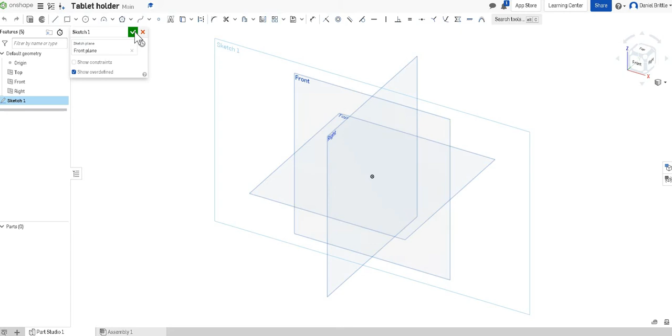We're going to start by creating the adjustable bit that actually holds the tablet. So we'll start on the front work plane, start a new sketch, and draw a rectangle to start with. We'll look at it from the front to make it a little bit easier.

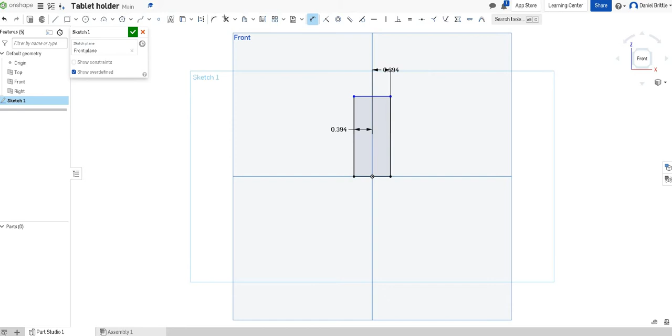I want this to be even, symmetrical either side of that centre line, which will make everything easier as we move on, especially because we want different parts to interact with one another. The width of this is going to be 2 centimetres, so 1 centimetre this side of the line and 1 centimetre the other side. We'll change our workspace units to millimetres, which will make it a bit more user friendly as we move through all of this.

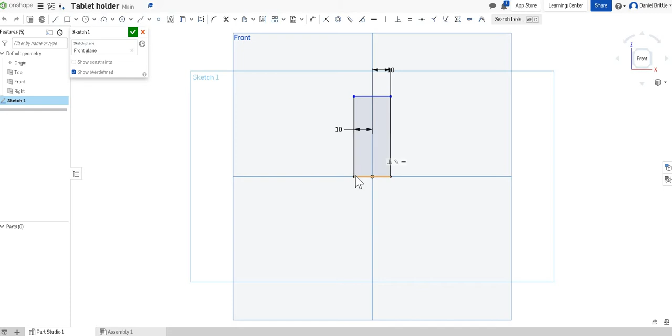Go back into our sketch, since it automatically exited. Right click and edit, and you can see it's 10 millimetres either side, which is perfect. We started it from the bottom line, so using the dimension tool we're going to measure the distance up, making that 220 millimetres to start with. That's quite a long section.

We're then going to create the bottom part across here, and you imagine our tablet would sit on there, with this bottom part holding the bottom. This will attach to another part which will hold the top and clamp them together.

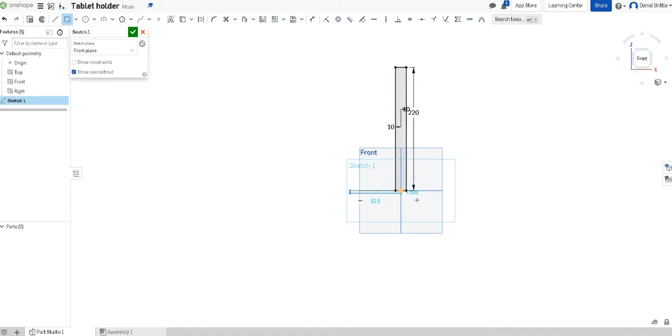So we're then going to draw a rectangle in here. That's not actually connected to that dot for some reason, very odd, so go up to make sure it does connect. This time I'm going to zoom in to make it a bit easier, connecting and going that way as well.

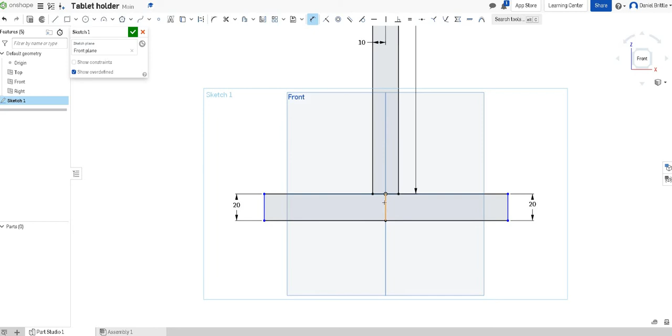Let's dimension everything. This is going to be 20 millimetres, so it's the same width as the part going up the top, 20 millimetres this side too. The reason I've done that in 2 blocks here, we'll see in a little while.

This part here is going to be 70, because it's 140 wide in total, and we're going to go 70 from this side as well, giving us that 140 total distance.

We're then going to use the sketch fillet. So we can either 3D extrude our sketch and then round it, or fillet the 3D, or you can do it in a sketch. We're going to do it in a sketch.

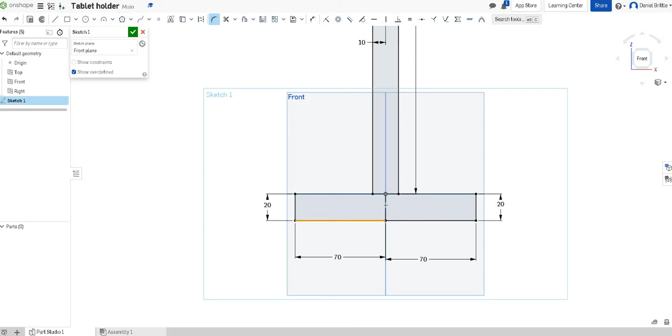That is going to fillet here, and we're actually going to change that to 20 mil. We're then going to do the same on here and change that to 20 mil as well, so that's even. This part on here now, we don't want that to be 20, we're going to make that 10.

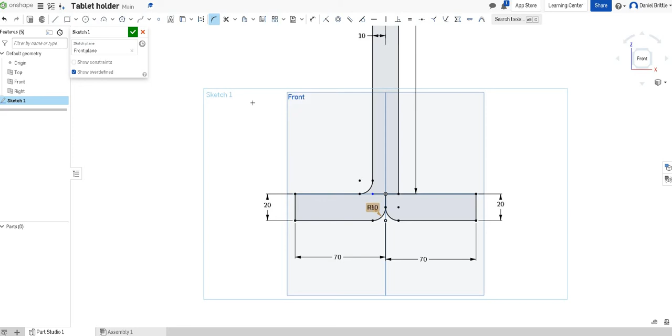It's actually moving that at the same time, so if I go Control and Z on my keyboard, it takes that backwards. We'll leave that at 20, and we're going to go in with the final one from here to here.

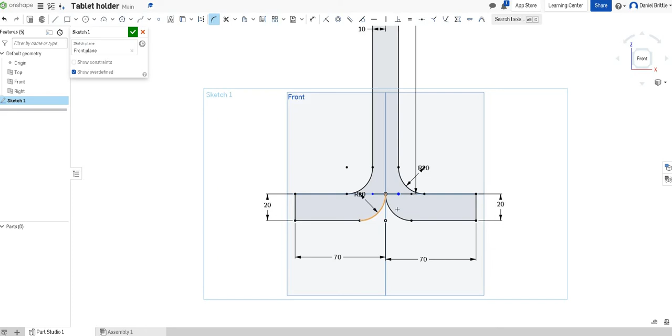I've lost my sketch tool now, so it goes back into sketch fillet, and we're going to do that one as well. That's just made that one 10, we'll up that to 20 so they're all the same. We've roughly got the look that we're going for, so we'll click the tick, and we're happy with that now.

This is all 5 millimetres thick. So what we will do, just looking at it in 3D, extrude, and make that a 5 millimetre extrude, tick. We're then going to add the little mounts here and there to actually hold the tablet.

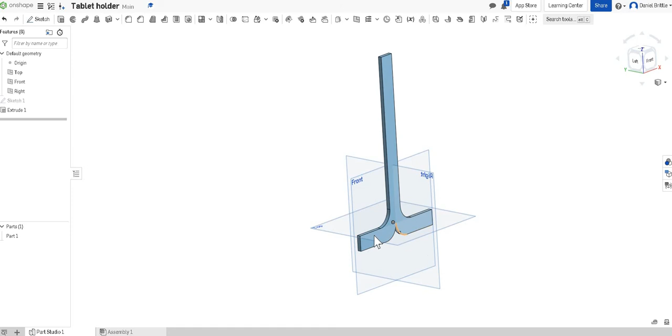We're going to click on this surface, go to sketch, look at it from the front, and we're going to extrude now 2 rectangles in these bottom corners here. So one there and one here, and we're going to dimension those with a little bit of accuracy as well.

Using the dimension tool, we want the height, that's going to be the thickness that we extruded the other part, so that's 5 millimetres, same on this side, 5 millimetres, and the width of those is going to be 20 and 20. We can then tick that.

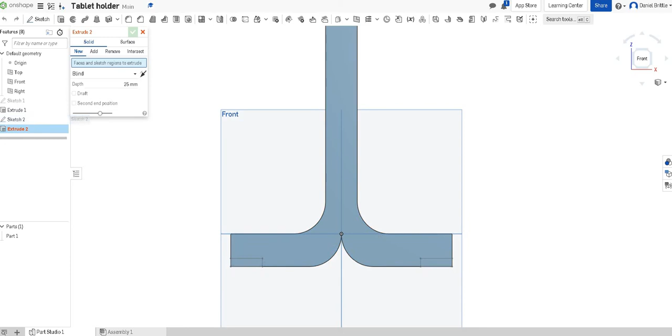We're going to extrude, select sketch 2 so it does both at the same time, and we're just going out for 25 millimetres on this, so 25 millimetres on there. So far so good. We just need a bit going up off this to stop the tablet falling forward.

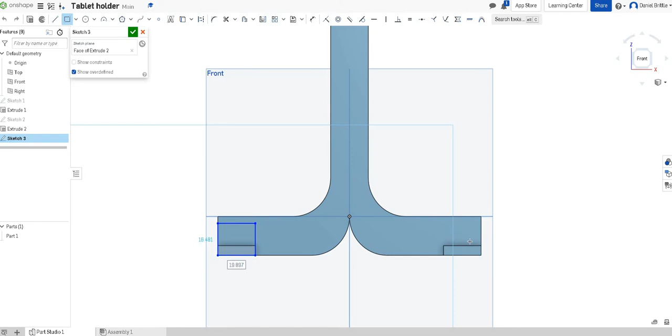So again, let's click on the surface we want to sketch on, click sketch, look at it from the front. We're going to draw another rectangle on there, and I'll show you a trick as you're hovering over the corner, making sure we've got the circle with a square around it to say it's snapping to that corner. Then dimension it, going roughly halfway, maybe 15 mil on this side as well, and the width to be 20, matching the other rectangles we drew out. Click tick, look at it in 3D.

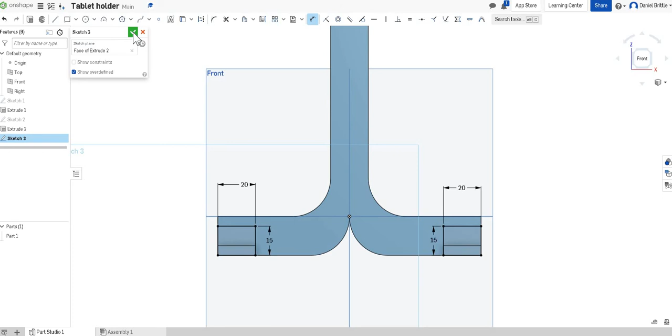We want to extrude the whole of sketch 3, selecting it from the menu here. If we click down here, it would only select a part at a time, so we're making that 5 mil to match all the rest. We click finish on there, and that is all looking good so far.

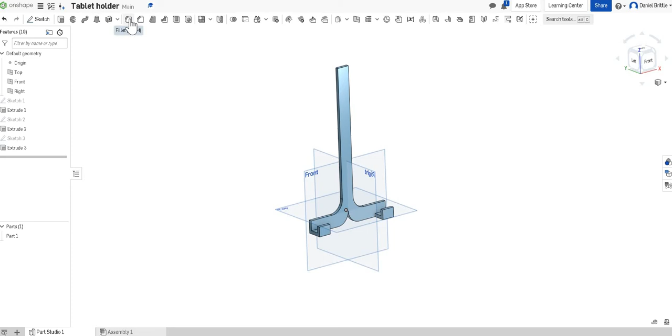What we're going to do now is add some rounds to all of the edges to make it look more realistic, as if you're actually seeing it in real life. So we're going to use the fillet tool here. We're going to select this surface, so all of the lines on this surface are filleted 1 millimeter.

And then if we turn it round, we're also going to do that on the back side here. It's throwing up some errors there, so let's see when we click tick what happens. And you see it's failing, so what we want to do is try and figure out why that's happened.

So we're going to right click and edit. See the red line down here? That's indicating it's going to fail. So if we deselect those faces, we're then going to select the lines going around, and we can keep clicking around all of these to see what's happening.

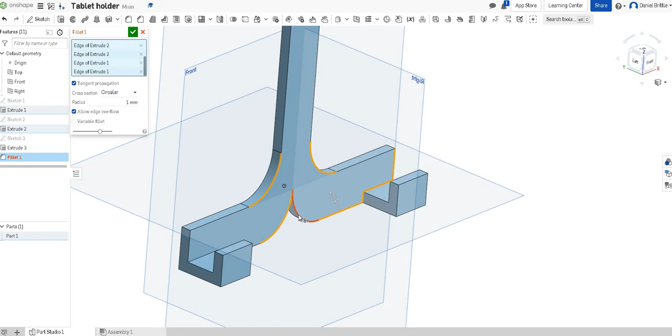So we're going round all of those now to there. You see it's not liking these ones in here. So we can get rid of those, get rid of these until we've got no red lines at all.

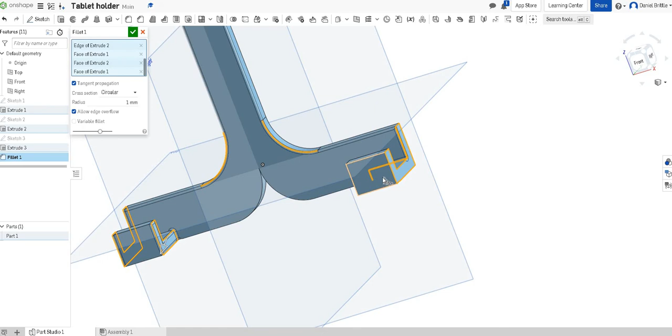And we can just do it a part at a time. So if we do these end faces, it's doing all of those. End faces on here, and it's actually doing these more successfully than we were a moment ago. So zoom in.

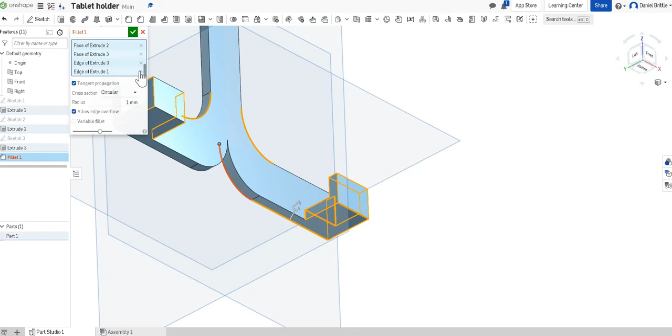It's not liking that one there, so we'll deselect that face again, and just select this line. Not liking that one either, so we can take it off. Whenever you see a red line, we can just take that off, and we can go and adjust that a little bit later on. Going on here and on this line, so they're working quite nicely.

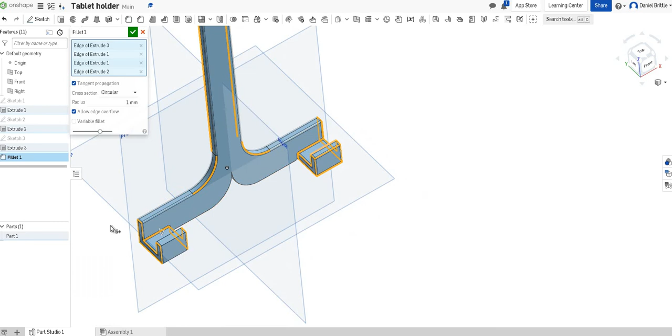We've got the ends, and most of these now are done. One I would like to do is this inside to match that side as well, and this inner corner. By giving that a fillet, it actually makes it a stronger part as well. So when you are manufacturing, you tend to create these fillets to improve the strength of different parts in many cases.

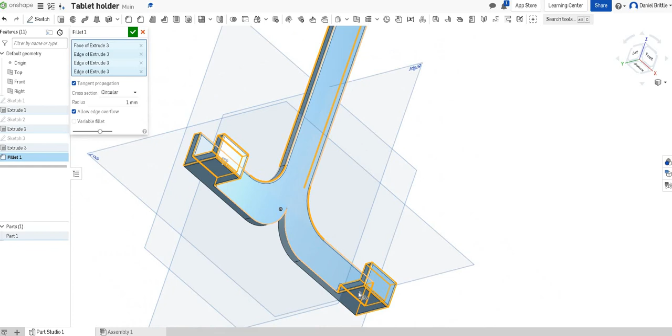So it looks now like we've got most of our filleting done. I'm going to just click the tick on that, and we can have a look around so we can see that there's not too many missed.

The most obvious ones are on the bottom there that were playing up and giving us the red lines, and we can go and try and work them out in a moment, but if we can't work them out, they can stay as they are, and we'll just avoid the issue for a little bit longer.

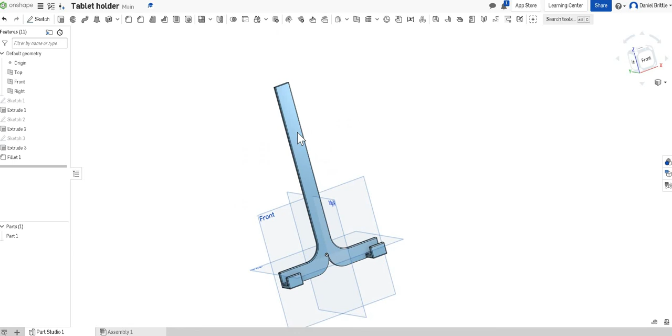Okay, so that looks, for me, fairly realistic. The only disappointment is these corners. I think they look a little bit sharp and tacky, so I'd like to go back in and round them more. And the reason we're doing this and changing our mind is because you don't always know what you want to model straight away, so I would like you to really learn to go back and change features.

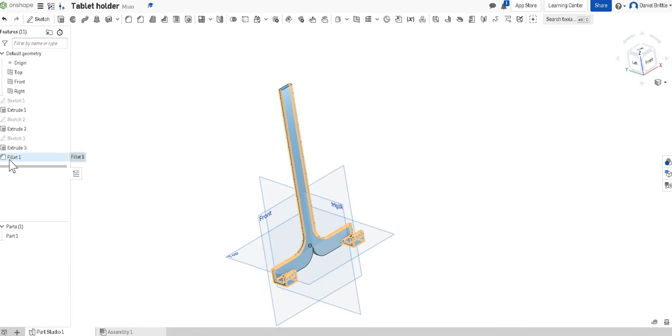So we're going to wind everything back to before this fillet, putting in a new fillet first and then redoing this without deleting it. So we right click on extrude 3, and we're going to roll to here, and you see it puts a grey line in and it removes the fillets, but it's not deleted them, they're still there, and we can get them back in a moment.

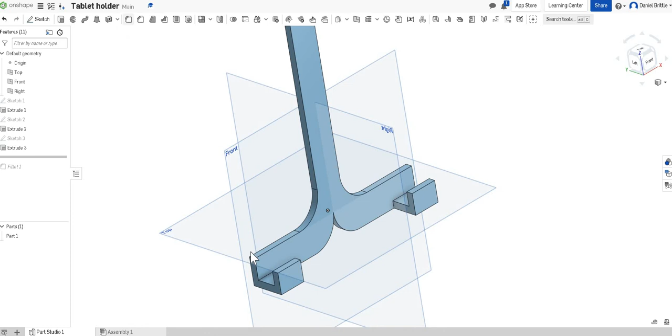So we're going to go to fillet again. We're going to round this small edge and this small edge in here. That's only doing it 5. I think 10 might look a little bit nicer, and then we're going to click the tick. So we're happy with that.

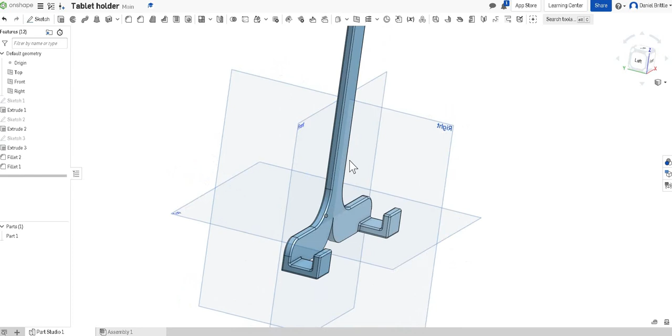Now we can right click on fillet and roll to end, and it will bring that back to life, and you can see all those fillets have been put straight back on, and it's working quite nicely. Good luck.